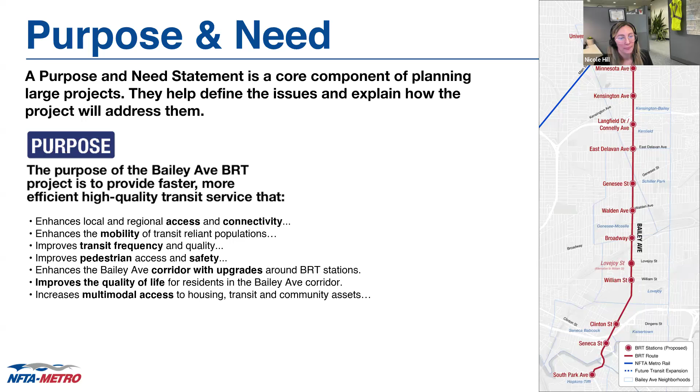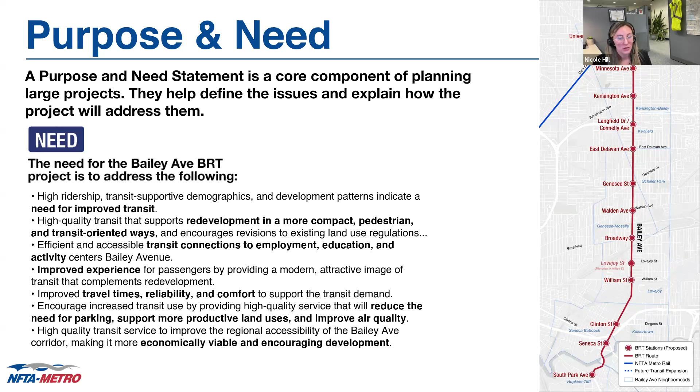The need for this project is to improve transit service and experience for a high transit ridership corridor, encourage transit use and connections to employment, education, and activity centers, as well as encouraging compact transit-oriented development that is accessible and pedestrian friendly. The expanded purpose and need statements for this project can be found on the open house boards, which are located on our project website. They are really great, and I suggest taking a look at those. Next slide, please.

So I'm sure you're probably wondering, what is BRT? Bus Rapid Transit, or BRT, is a bus-based transit system that includes new schedules with more frequent service, transit priority features like special signals and bus lanes for faster buses, and high-quality stations with amenities for enhanced passenger experience along a dedicated corridor. BRT systems from around the country were investigated as part of this project, and the team used peer BRT systems to help inform the features and designs for the Bailey Avenue project.

So the Bailey project will include those transit priority features to reduce travel times. Some examples of the upgrades being included in this project are shown here, including enhanced stations, special transit traffic signals that include treatments like queue jumps, transit signal priority, and dedicated bus lanes in select locations. The project will also include more frequent and reliable low or no emission buses, as well as pedestrian improvements at crosswalks and streetscape improvements along the corridor to make the corridor safer.

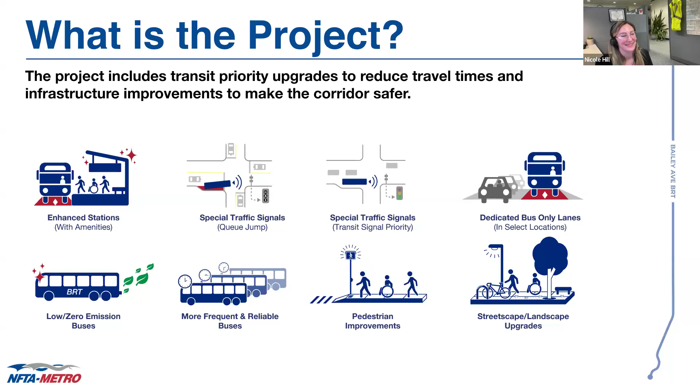So we are about to share a bit of information about what we've heard from members of the community so far, as we've conducted a lot of outreach beginning in November and December and in January. But before we do that, we want your unbiased answer. What improvement would you most like to see on Bailey Avenue? Julie's going to launch this poll, and you'll see that our options, since this is a transit agency having a public meeting, talk a lot about transit, but there are also options around cars, space to park, and access to businesses. If there's not an option here that resonates with you, or you have another idea, you're welcome to use the chat and let us know: the improvement I'd most like to see on Bailey is...

I see people are answering though. Thank you so much, this is poll 2 of 5. Great response rate. We've slowed down a little, maybe we wait another 15 seconds here. Okay Julie, I think that might be it. So let's end the poll and share our results so everybody can see.

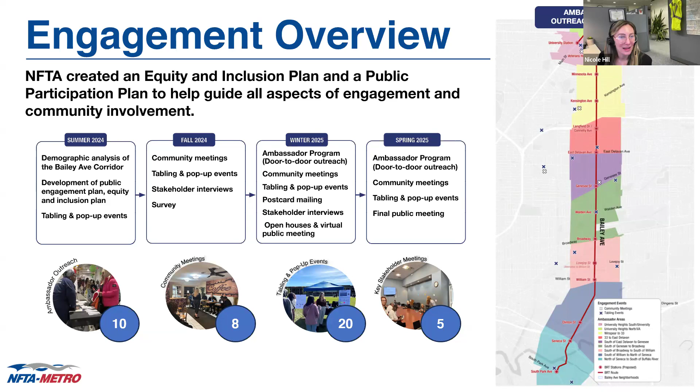As previously mentioned, we've done a lot of studying of the existing conditions throughout the corridor to inform the next steps of this project. The project team reviewed transit data to ensure the recommended BRT station locations from prior studies still provided the desired transit benefits we were hearing from the community. The team investigated the Bailey corridor and confirmed the proposed station locations would still have the highest ridership.

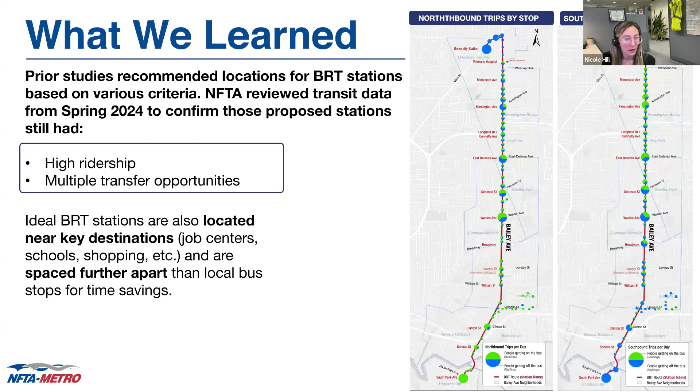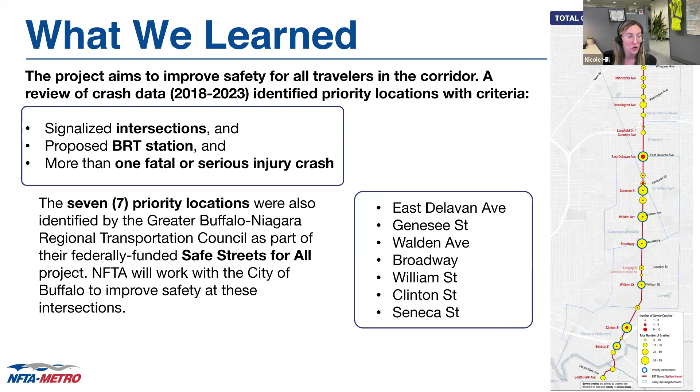The intersections with the highest number of crashes were also identified as priority locations by the GBNRTC, or Greater Buffalo Niagara Regional Transportation Council, as part of their federally funded Safe Streets for All project. NFTA is working with the City of Buffalo to improve safety for all travelers at these intersections. The 7 intersections are East Delavan, Genesee Street, Walden Avenue, Broadway, William, Clinton, and Seneca Street.

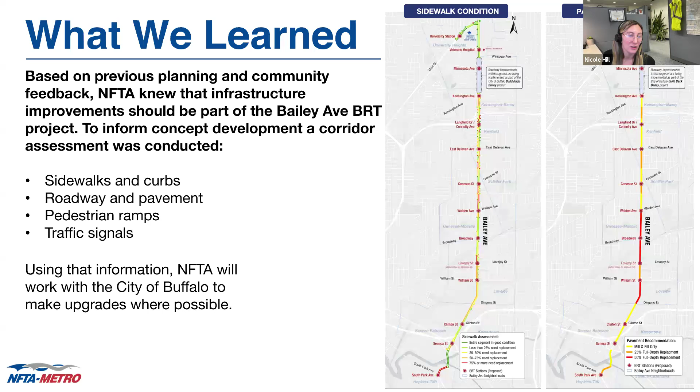If you are interested in looking further into these maps and the specifications, you can also find these in the project boards listed on our website.

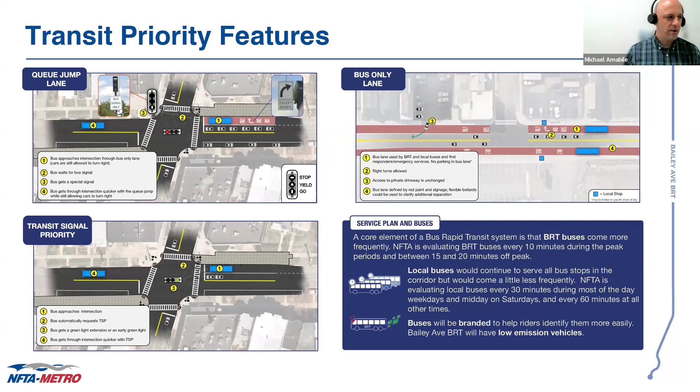Thanks, Nicole, and thank you all very much for being here. It's exciting to see all your questions. Earlier in the presentation and in the materials online, you'll see little icons with graphics to illustrate the elements of the project. As Nicole just covered, the station area and station amenities is one of the first ones, very focused on riders and overall mobility with the mobility hubs.

I'm now going to talk briefly about some of the transit priority features, the things that are intended to allow the buses to move more quickly through the corridor.

The first, in the upper left-hand corner, are called queue jumps or queue jump lanes. It's a mix of a short bus-only lane, often complemented with a special traffic signal intended only for the bus. The goal of this feature, which you can see more about in the materials on the website, is that it's a short area where the bus can literally jump the queue, getting ahead of vehicles waiting to get through an intersection. They take advantage of this by using a bus-only or bus-and-right-turn-only lane, and then a special signal.

Below that is a graphic about transit signal priority. This is technology where the bus communicates with the traffic signal to hold a green light longer so the bus can get through the intersection, or if the bus is approaching on a red signal, to call the next green phase in the cycle sooner. All of this is done safely. This technology is used around the world, around the United States, and here in New York State, and it's an effective way to help buses move through corridors more quickly.

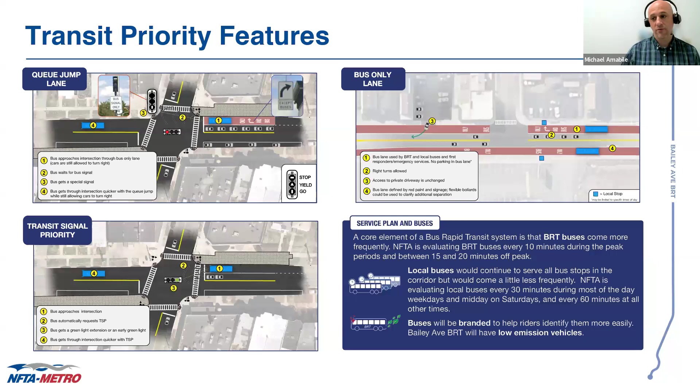Another icon is about pedestrian improvements. While not explicitly part of all BRT projects, NFTA in conjunction with the City of Buffalo and prior planning efforts had identified the need for pedestrian and general safety improvements in the corridor. As discussed, there's a Safe Streets for All study going on. The intention is to improve things that support pedestrian safety and accessibility at all BRT stations and elsewhere in the corridor, like crosswalks, pedestrian ramps, and push button signals. Where possible, there will be bump outs which shorten crossing distances. These improvements are also intended to be part of the project.

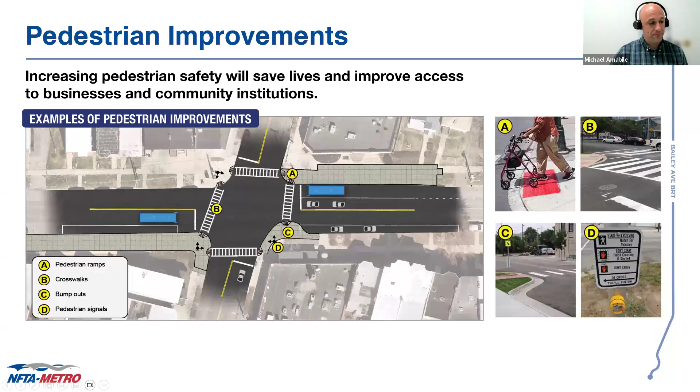And the last piece, referred to as the streetscape. These are improvements outside of the roadway that add to the overall comfort, look, feel, and safety of the corridor. They include things like street lights, benches, and landscape elements, whether it's trees or planters.

In order to help identify the right mix of these elements, NFTA developed a typology based on the land uses, types of businesses, and buildings in different parts of the corridor, and applied a certain treatment to each. This is just one example, the strip commercial typology. There are others too: a traditional mix of commercial and residential, a pure residential typology, an industrial, and an institutional typology. Please refer to the detailed material on the website and on the boards. We want people to understand that in addition to the transit priority that comes with the BRT project, NFTA and the City of Buffalo will also look to make these streetscape improvements as the work progresses.

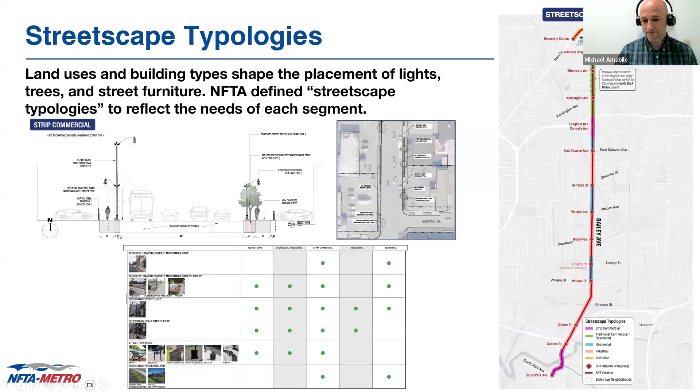So now all of those parts and pieces, the stations, the transit priority features, pedestrian improvements, and streetscape, they all come together in a place we're referring to as the station areas, often at intersections, though not exclusively. As we go through these, we'll try to point out those elements.

Specifically, we want to make sure people can connect the dots from the station design Nicole showed you, to where that's going to go, and whether any of the station areas or intersections have explicit transit priority features. As of now, every signal is going to have the TSP transit signal priority feature, though you can't really see that. Some will also have the queue jump signal. Then we'll point out pedestrian improvements and streetscape improvements, which in general you can think of as part of just about all the station areas, and expand beyond there to the extent possible.

Now I want to wake up everybody's typing hands, because the development of these concepts is currently based on what we've heard so far from community members, existing conditions, and previous studies. We're going to go through all 13 station area concepts, and at each one I'm going to ask if you have any questions or comments. This is the most exciting part of the meeting, because you'll see what our team has been working on, and we really want to hear from you. Be patient with us, there are 13 of them. We'll move from north to south along the corridor, and Michael's going to review these four features, and we really do want your feedback.

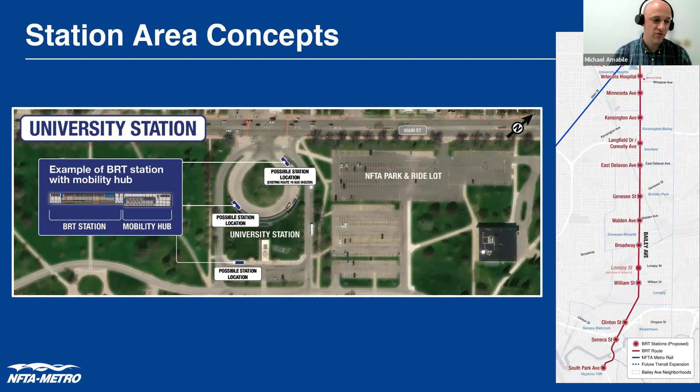So it's good to hear, nice to hear about the upper shelf. I don't know, I probably should have looked up how technically NFTA refers to that area, but until I'm told otherwise, we'll call it the shelf. And then one more comment: the 19 spot is okay as long as there is a BRT-like shelter. We need more shelters at the UB hub for all stops - many don't have shelters. Thank you, Doug, great feedback. Okay, I think we can move along.

Great. So this stop is Veterans Hospital at Cole Road, on the southbound side. Just to let everyone know as we go through these, there is a north arrow in the upper right. The nature of the corridor - I realize it'll be a little confusing because the map on the right-hand side is running true north and south, north on the top, south on the bottom.

But in order to fit the concept, the station area concept figures better, we decided to pivot it and turn things to run right and left. So on the map, north is to the top. On the figure, north is to the right. And to the right here, you'll see on the southbound side, a full BRT station. On the northbound side, this is the end of one of the shorter bus lanes that runs from Winspear North here to the entrance to the VA hospital, which is on the bottom part of the figure here.

And NFTA has met with the VA hospital administration about integration of this design into the existing curb there. There's currently a bus shelter that's kind of cut out and stuck into the parking lot. We're kind of open to expanding the footprint here a little bit, to make for a larger waiting area in the northbound, and same within the southbound. And then to the extent possible, again, upgrades to pedestrian infrastructure.

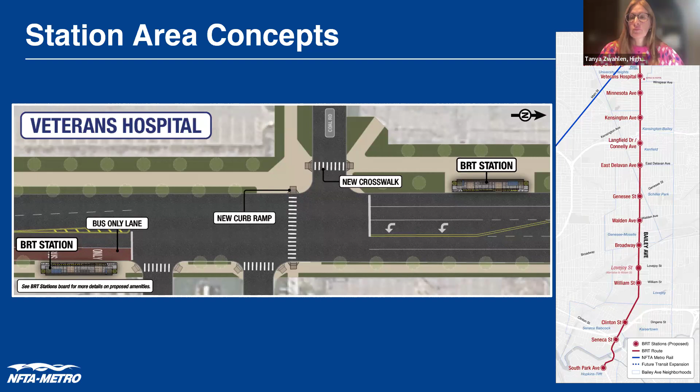Okay, all right, this concept should address that. Thanks. Go ahead, Minnesota. Yep.

So these next two, Minnesota and Kensington, just want to remind folks again that as you'll see here on this graphic, and if you look through some of the boards it'll be pointed out, as Nicole had pointed out, the city of Buffalo is currently engaged in a project referred to as Build Back Bailey - kind of a full roadway redesign, streetscaping. The city of Buffalo and NFTA are working closely together. It just so happened that that project got started a little ahead of NFTA's Bailey Avenue project, but there's lots of synergies between them.

So basically from Winspear till Midway, just north of Kensington, which you'll see on the next figure, a lot of the roadway improvements and sidewalk improvements were already in the works from the city of Buffalo. And really here, at Minnesota, NFTA has been working with them to figure out the best place to drop in the proposed BRT station. So the prior study had always called for BRT stations at Minnesota. Again, the city of Buffalo is advancing their design around streetscaping, sidewalk improvements.

You'll see things here like bump outs or curb extensions that shorten the crossing distance. You'll see new striping to facilitate better left turns. And then on two of those curb extensions, this one on what would be the west side of the corridor in front of the church, there'll be a BRT station. And then on the northbound side, in front of a convenience store, deli, there'll be a station as well. The gray boxes there are a little misleading.

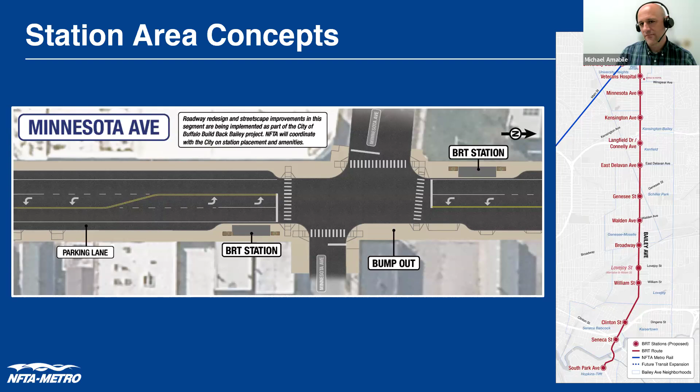Fair enough, great. Okay, so at Kensington, the Build Back Bailey project originally terminates in this area. This is a place where the City of Buffalo and NFTA work together to coordinate on some features here. There are bump outs at the Kensington intersection to shorten crossing distances, ramps will be upgraded, and there'll be BRT stations on both the east and west side of the northern part of that intersection.

Here's an opportunity to point out one new feature we haven't seen yet in the corridor, which is a queue jump lane, a bus only queue jump lane. Southbound buses will use the right lane to serve the BRT station in front of the soon to be built Evergreen Medical Center. When they're done serving that station, they will call for a queue jump signal, because you have one lane going southbound feeding into one lane. To allow the buses to get a head start, or quote unquote jump the queue, they will call a special signal that allows them to get in front of traffic southbound and proceed further south. So that's something to call out.

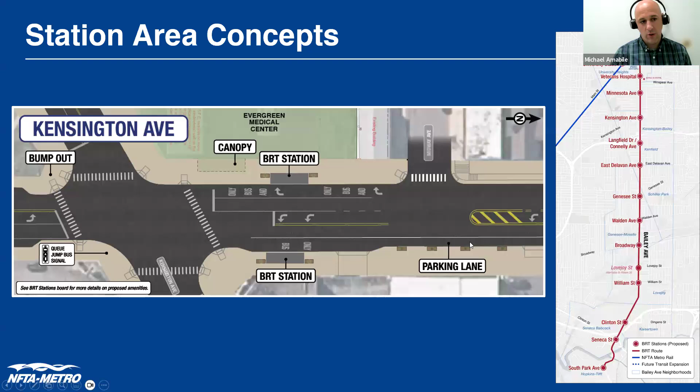So Langfield Connelly, I'll try and point out the most interesting or exciting things. Again, northbound has a queue jump. Bus only right turns are allowed in that curbside lane, and then we'll call a signal. There are pedestrian upgrades called for, as well as the parking lane that will be maintained southbound.

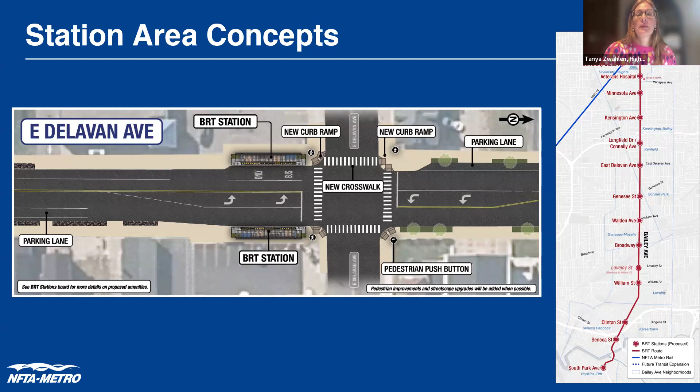Okay, I have a comment or question on Kensington, one back. What's the approximate depth of the Kensington stop? And for Delavan, are these typical urban crosswalks or are these hawk crosswalks like on Sheridan? I apologize that I'm not familiar with Sheridan, but I am familiar with hawks. These would be traditional, typical signal crosswalks that you'd get at a signalized intersection. Generally speaking, hawks are mid-block treatments. I don't think this would be an appropriate location for a hawk, because you would just use a regular traditional traffic signal. As for the depth of Kensington, I'd have to look that up and get back to you. By depth, I should clarify, do you mean the depth front to back of the station, or the length of it from one end to the other?

Yeah, and Sean, if you have a concern, you could also clarify. He says front to back. Yeah, we'll go look them up. I believe they're 15 feet front to back, don't quote me on that, but we'll get back to you.

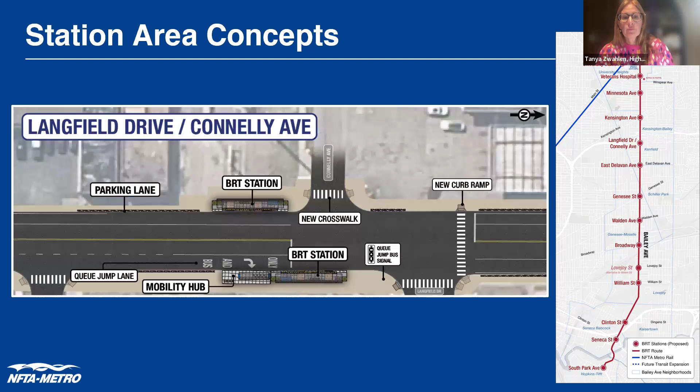Genesee, another location where there is a northbound queue jump, and also would want to call out the bump out. On the northbound side, on the northeast corner, you'll see a bump out to shorten the crossing distance. This is again another location identified for pedestrian safety. This location, Genesee, also has a mobility hub, and we'd certainly want a nice treatment here. We know there's a significant number of transfers between the 24 and the 19, so for locations like this, we try and keep those things in mind. In this case, the southbound 19 wouldn't be stopping near side anymore, it would run through the intersection and stop far side, on the south side of Genesee.

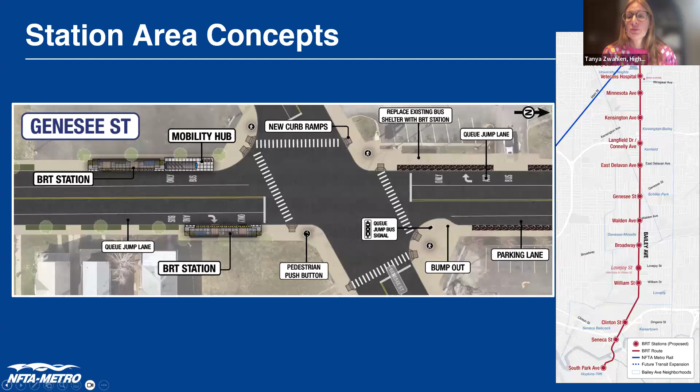Any questions or comments about Genesee? One comment is that it's another intersection needing a complete overhaul. Certainly, we're going to try and do as much here as we can.

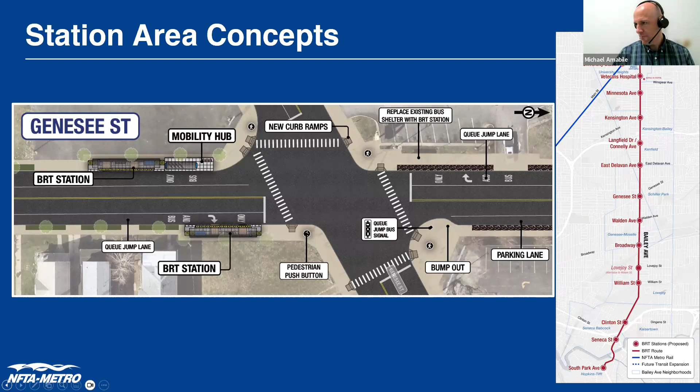So, Walden. On the northwest corner of this intersection, there's a kind of strip mall with the Signature Beauty Supply and the Palli Supermarket, P-A-L-L-I. I'm not sure exactly how it's pronounced. There may be a slightly tighter area there for fitting in a BRT station, but NFTA does have a few different designs if needed, so that's something to call out.

The other thing is this would be a location for a mobility hub attached to the BRT station on the northbound side. South of Walden, this is essentially the start of one of the bus lanes, which runs more or less from Walden all the way south through the Broadway intersection to Stanley, so we want to call that out.

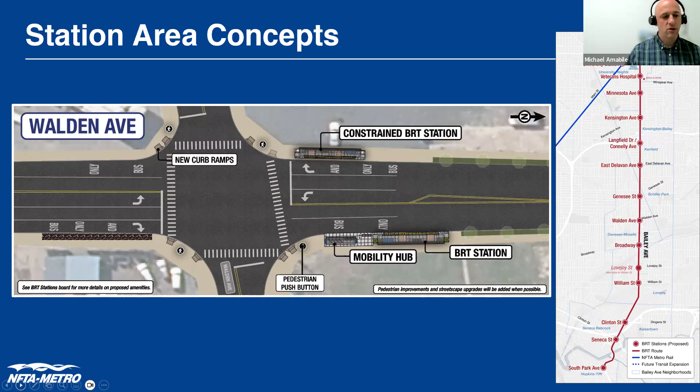One of the things happening here is as the roadway opens up, this is an area where a lot of people talked about the need to improve safety, and making the lane markings clearer could go a long way to do that. Any questions about Walden? We did get a comment in this section between Genesee and Walden about speeding and ignoring lanes.

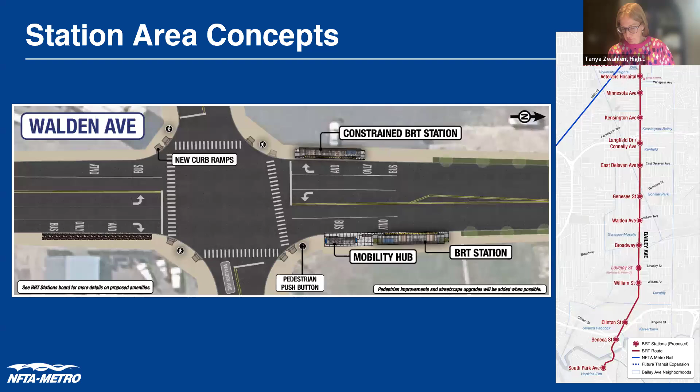If not, let's go to Broadway. We're at 9 of 13.

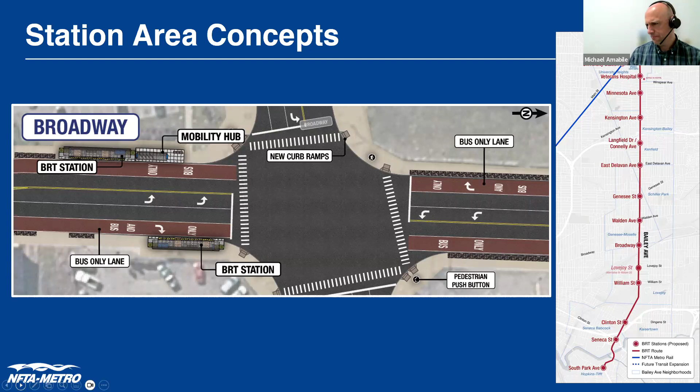A comment: we should note that the regular 19 will continue to run and stop at all stops, while the BRT will skip some stops to be faster. Thanks, Doug, excellent.

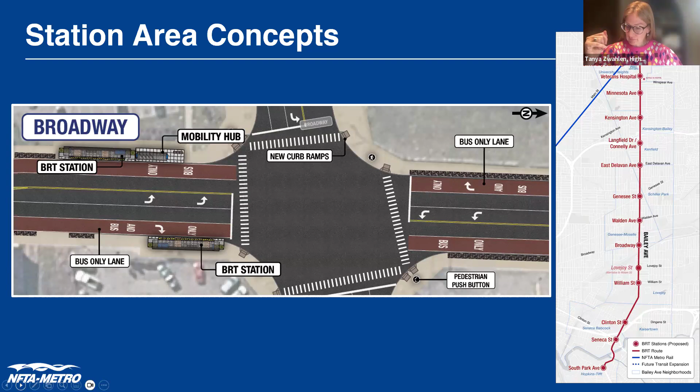Any comments on Broadway? Comments or questions? We do have a poll coming up, so be ready for that.

I'll try to be quick here, less focused on details and more on the big picture. The prior study had identified 13 BRT stations. Our task this time was to validate those or confirm whether they still made sense in terms of ridership, connections, and other infrastructure considerations. Our team, in conjunction with NFTA, thought it might be worth having an alternative to a BRT station at William, at Lovejoy Street.

The one bus goes across Lovejoy, turns, goes south on Bailey, then turns again at William. Both stations would be able to serve connections or transfers to the one, but the case was made that Lovejoy is a little more residential, while William is a bigger, busier street and maybe less inviting to wait for the bus.

We are proposing a bus bulb on the northwest corner to accommodate a BRT station, with a queue jump at the William intersection. The Lovejoy option would have bus bulbs for the bus to stop on those curb extensions. So let's open it up and see if people have thoughts.

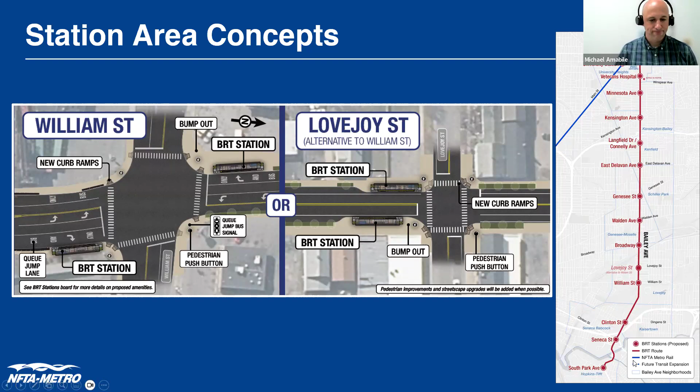Should I just go right to the poll, Tanya? I think let's go to the poll.

We have a question, and we're interested in your comments and any questions through the chat. We have a specific question about this area of the corridor: where do you think NFTA should place the BRT station here, William and Bailey or Lovejoy and Bailey? If you don't have an opinion, you don't need to answer this poll, but if you use this part of the corridor and have an opinion, we'd love to hear from you.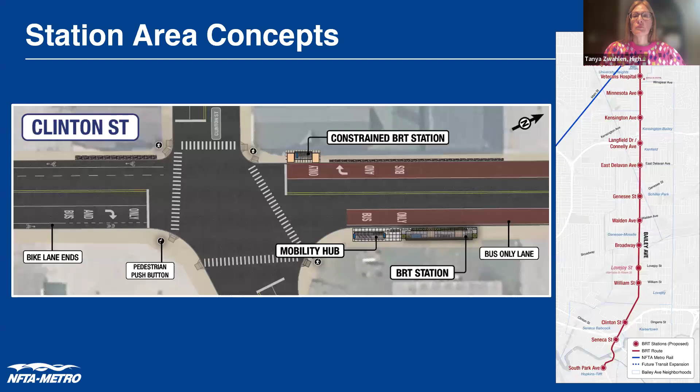Any questions or comments about Clinton Street? Not hearing any. 6:43. Let's keep going. Great, 2 more.

Seneca, again, very wide section here. There are bike lanes in both directions. Again, those will be maintained. Mobility hub on the southbound side. Nice full BRT stations.

I think someone just had a comment about hopefully an increase in ridership. That would be great. As you look towards the southern part of the corridor, there are some longer stretches, and if you look at the figures, certainly ridership isn't as robust in some of these areas, but still lots of riders here and opportunities to make transfers to some key east-west connections as well.

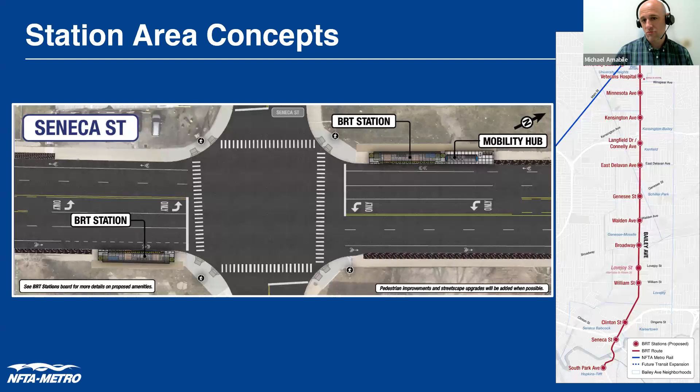Any questions or comments about Seneca Street? How is Elk Street incorporated? Elk Street is not a BRT station. Any local service that's currently stopping at Elk will continue to do so. Thank you.

Okay, last one, and we do have a poll coming up. So listen to Michael's descriptions of these examples of transit hubs, because we're going to ask you which one you like the best. Yeah, thanks, Tanya.

So the prior study and NFTA had wanted us to think about, can we do something a little bit bigger, a little different to anchor the BRT line here? And there is kind of a turnabout across the street from Tops.

I saw some comments earlier about the need for improvements at the intersection of South Park Avenue and Bailey and near Abbott. At this point, of course, any pedestrian improvements or upgrades at that intersection will be considered as part of the project.

But what we're looking for here is the idea of maybe using that space down there to incorporate a slightly larger footprint or a larger kind of visual presence with a transit hub or mobility hub, which of course would also include larger canopies, shading, and seating and things like this. It's also a key location to facilitate transfers between the 23, the 14, the 16, and the 19.

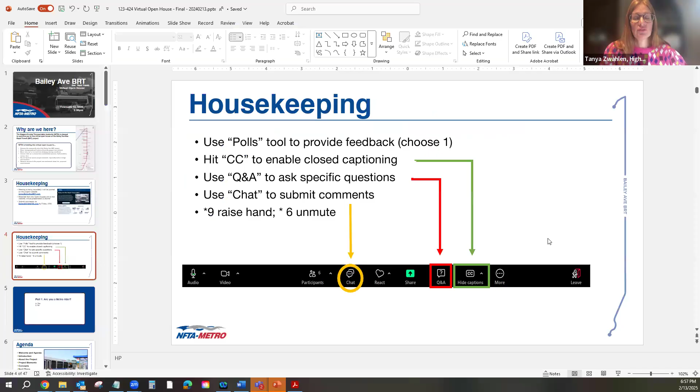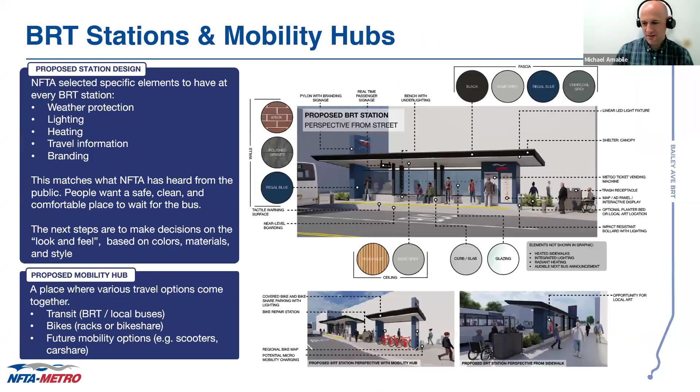Apologies, no, in the chat—hit the wrong button, sorry guys. Oh, that's okay, you can just quickly see everything we saw. How many slides? We don't want to know. Too many, so many. There we are.

Just a reminder, we would love to receive your feedback by email at baileybrt@nfta.com. This recording will be on the project website after this meeting, and all the boards from our open houses are there. Sorry, Nicole, I stole your slide.